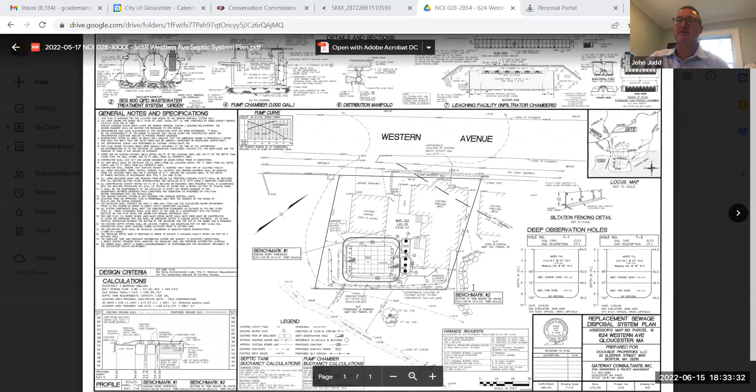At the time, there was some discussion with some of the neighbors relative to a pipe. If you remember, as I read the deed to the commission, the easement is for the benefit of this property to discharge to the neighbor's property. It's just a small pipe that leaves the foundation. We're not going to be impacting anything behind the house other than replacing the existing sewer pipe, a solid 4-inch pipe. Any pipe that may exist through that deed, and there's no maps indicating where it is, we would not be disturbing anything behind the house other than replacing that existing sanitary pipe to go into the new components for the system, which have been approved by the Board of Health.

So we're not increasing any impervious areas here. We're not creating any more runoff. Everything is going to be a pervious grass surface. Again, we're getting this contaminated system out of the groundwater and putting in advanced treatment systems. So I can answer any questions you might have.

Okay, next up is usually the public comment period. This is a period where anyone may speak for or against the project at 624 Western Avenue. You may do so now by hitting the raise your hand button at the bottom of your screen or hitting star 9 on your phone or handheld device. And I see an Amy Hubbard. I'll allow her to speak.

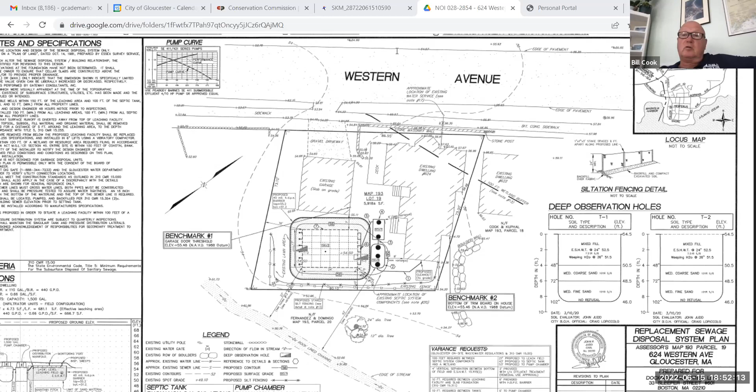Member Cook: we had this discussion last time, and I know several of the neighbors are pretty adamant about pipes running out. One even insists that the pipes are going to go where the new system's going. We need to make sure, if we move forward with this, that we're aware of any additional pipes the neighbors swear are there. What we don't want, and Adrian discussed this too, is if any pipes are discovered, they cannot replace them and put them back draining into the stream. That's a big concern, because it would create additional problems for the people there. So somehow in the order of conditions, I don't know if we have someone inspect it when they're opening it up, but we need to make sure that if there are additional pipes... I don't know if we stop the work, but as Adrian stated, we cannot allow the work to go forward knowingly having pipes draining into the wetlands.

Maybe a site visit would be good if the person's willing to let us go out and look at the property. Well, I think the applicant said you can see everything right from their yard. Yes, but if the pipes are pumping from pumps outside, we're not going to see that unless they have the drain pipes outside. Right, if they have underground pipes running out there, which the neighbor seems to think there are, the only way we could check is by looking at where their bulkhead is.

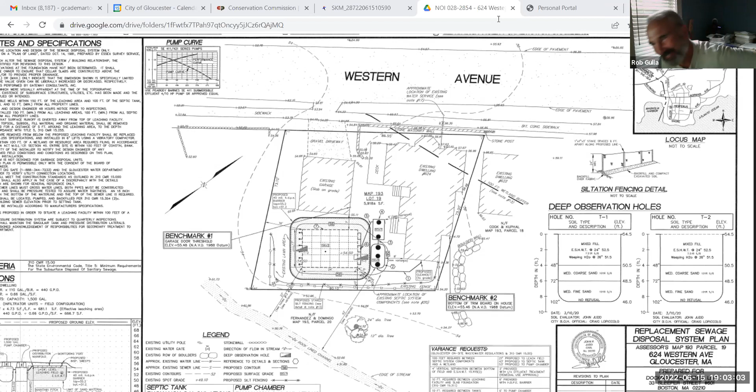So, Mr. Judd, could I ask you or your client to continue slightly? Absolutely. I just don't want to hear the same non-pertinent issues with the septic system again—I completely understand it, I get it. So absolutely, Mr. Chairman, if the board needs another two weeks, I'm going to be here anyway.

They waited this long to have the system installed, so absolutely. I just didn't want to have this situation where we're just chasing our tails. If they need to hire an attorney, then they need to hire the attorney, and the attorney should be here.

Or they should file a civil matter against the owner. This is a septic system replacement. I think they're talking about historical groundwater issues in this neighborhood, and these houses are awfully close to each other. We're just trying to remedy a situation.

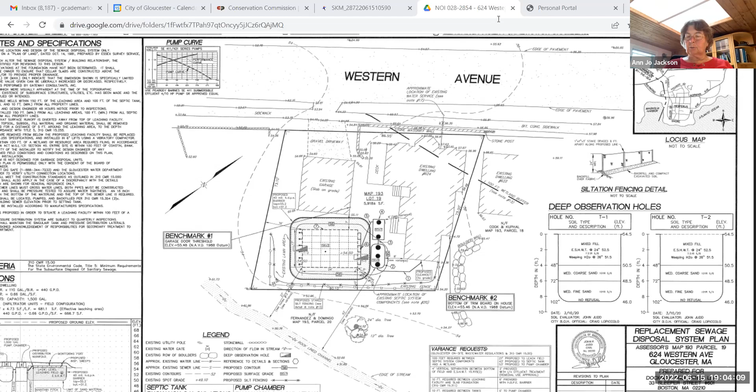Okay, thank you. So with that, can we get a motion to continue the project at 624 Western Ave? Commissioner Jackson moves to continue NOI 0282854 at 624 Western Ave to the meeting of July 20th. Charpentier seconds. Roll call vote.

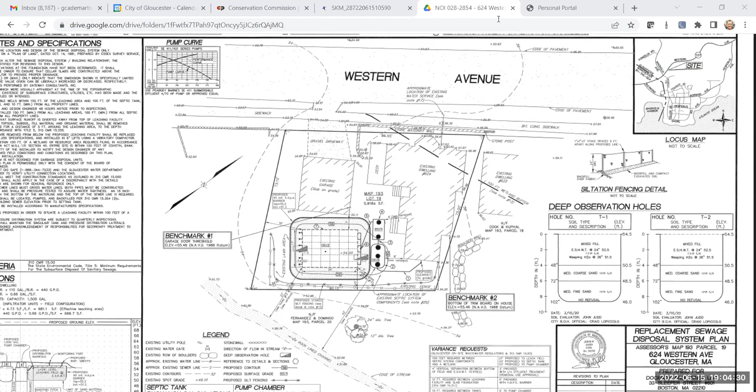Member Charpentier, yes. Member Cook, yes. Member Gradwall, yes. Member Sergeant, yes. Member Gulla, yes. Member Jackson, yes, and Member Sherman, yes.

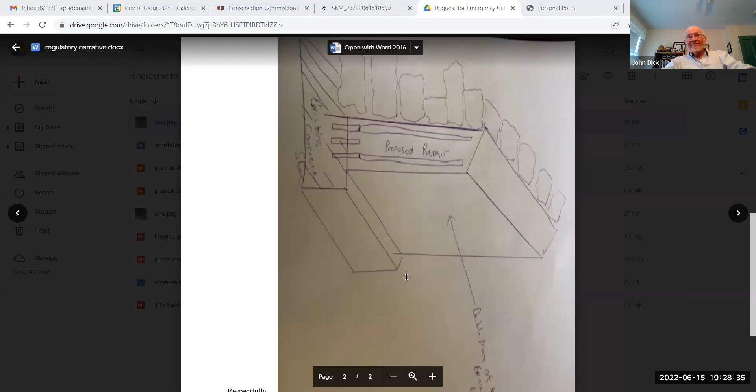So you're looking for the photograph or the drawing? The drawing of the concrete wall in front of the revetment. Concrete never strikes me as being temporary. Yeah, I hear that. Well, that's why I was wondering if it was blocks versus poured concrete.

Yeah, there it is. And it's rotated. I don't think I have the ability to rotate that. Okay, it needs to go 90 degrees counterclockwise for those looking at it.

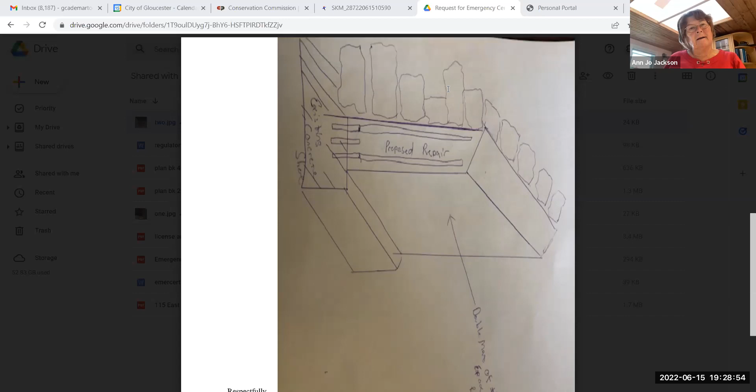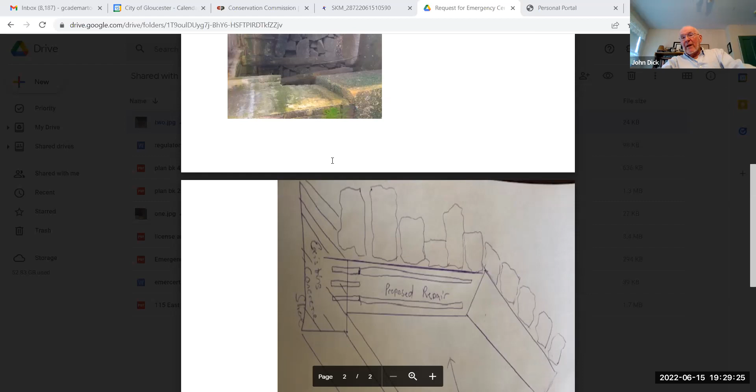The photograph you're looking at is about an 8-foot span. I don't think there's a heck of a lot more than that of immediate concern, but I have only seen this site once. I managed to pick a morning when it was very high tide. I didn't even see these stones except in the photographs. So I'd have to tell the commission, I haven't personally seen these exposed concrete footings or stone.

Is it possible to do like a wire netting to keep them in place until? I don't think it would hold. If that stone decides to move, that's about an 8-foot revetment between the wharf and the bottom. That's the full tidal range right there.

Okay. If we approve this, it definitely would be contingent upon an NOI, and one that should address maintenance of this site. It concerns me because this looks like something that they should have seen coming.

I don't disagree. It says on the requirements to obtain an emergency certificate, the commission must have sufficient information prepared, submitted, etc. The information may include the exact location, a detailed scope of work, what activities are going to occur, what heavy equipment would be involved, a general construction sequence, an estimated timeline, the limit of work on a sketch or plan, equipment, personnel access information, how will the site be reached, contingency information in case something goes wrong, contact information. And we can only approve actions required to remedy the emergency situation, which you were correct, I think, in withdrawing the pilings. But I think we're missing an awful lot of that information.

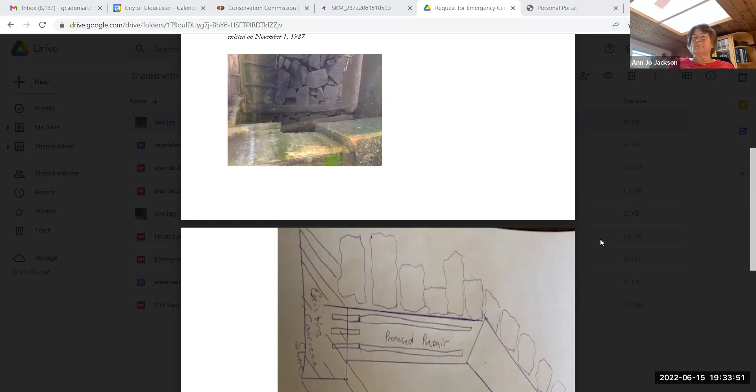Well, the current agent recognizes our feelings and has heard our input. You mentioned that the building department and a couple of people have taken a look. I don't think anybody started throwing emergency lights or telling anybody to get out of a building. I understand the difficulty of getting somebody to look at this, but a quick proposal is to drill into an existing concrete block and then pin to it.

That's why we have engineers. I don't disagree, and I don't disagree that if Bill Sanborn or Donald Belanger says tomorrow it's a lot worse than we thought it looked, and they're willing to sign off on it, then so be it. That's their job, they're supposed to look at those things. Short of that, this may not be what you would do if an engineer was to take a hard look at it.

I can assure you I will have seen it at low tide tomorrow, and I'll get you everything I can as soon as I can to back up the emergency cert. I really do think this is worthy of an emergency cert. I realize we're kind of a day late and a dollar short coming to the meeting, but I wanted to get this before the commission.

I like the idea of using the precast blocks and just having them hoisted into position and dropped down. Interesting idea, it would certainly help. And it gives all the appearances of being temporary. And for all practical intents and purposes, it is temporary.